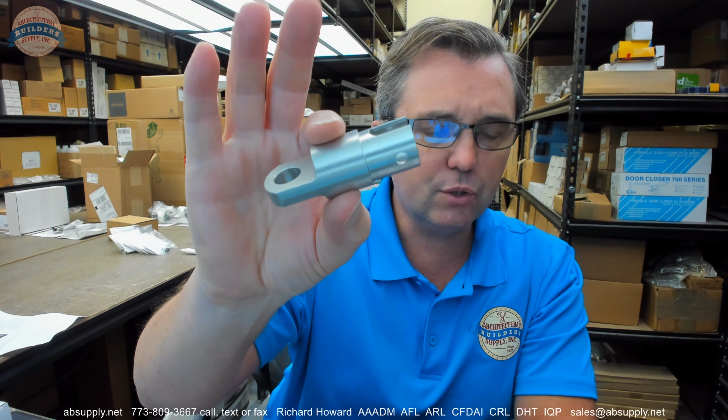But anyway, here is the box - 1500-2 - and here's your extension. The -2 stands for 2-inch, and that's the effective extension that you're going to get on this. You're going to have some bushings, a total of 4 bushings that you're going to get, plus I think it's a 10-32 machine screw and a nut for connecting it.

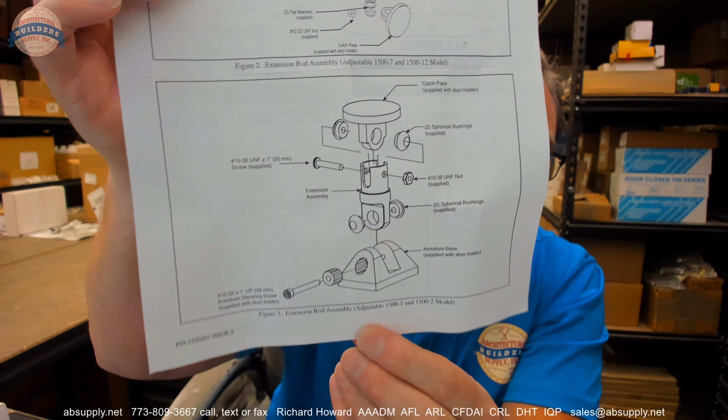You'll get a couple of Allen wrenches, and that is going to be required certainly in the disassembly of the 1500 unit that you are working on. Installation instructions are included; they're very simple and straightforward. The 1500-2 along with the -1, the 1 1/2-inch, is demonstrated down below.

Let's switch to the screen view and take a closer look at the supporting documentation.

There's also a link to the installation instructions. Let's take a look at those now. These are what is included with your hardware.

The 1500 series door holder extension kits are used where it's desired to hold doors open and where a standoff distance between the magnet assembly and the armature base is required. The extension rod kit can be used with these series of holders. Parts from these door holders are used with the extension kits to form a complete unit.

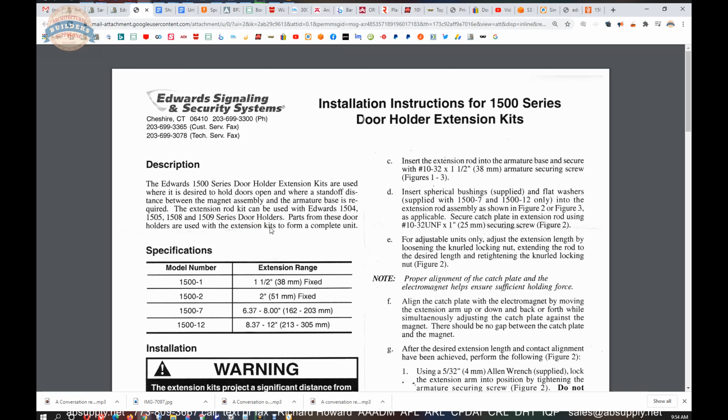What they're saying is you don't get everything you need with this, but you do get what you need to extend it. And we are looking here at our model.

So the bushings, 4 of them, are included here. The 10-32 nut and bolt, the extension assembly is all included.

A couple of Allen wrenches. You're going to need the Allen wrench for here. I'm not sure where the other one is supposed to go because the screw they've included is Phillips, although what you're removing from here is also an Allen drive, which requires an Allen key. That's why they include these 2 different sizes.

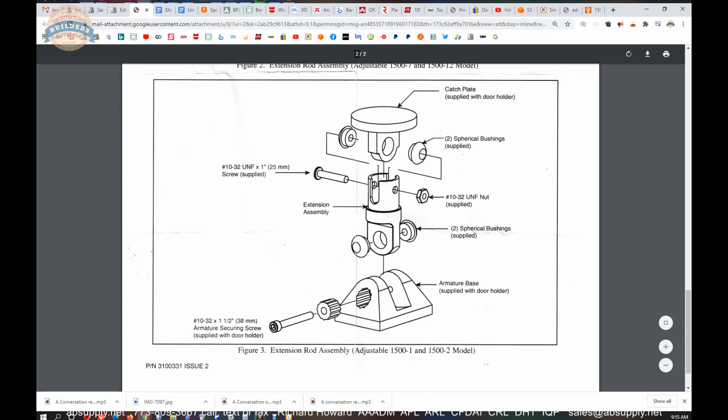I can put a caliper on them, let's just put a caliper on them, tell you what size these are. The larger of the 2 is 0.154, so what is that, 5/32nds? 1 divided by 32 times 5. Yeah, I'd say the larger one's 5/32.

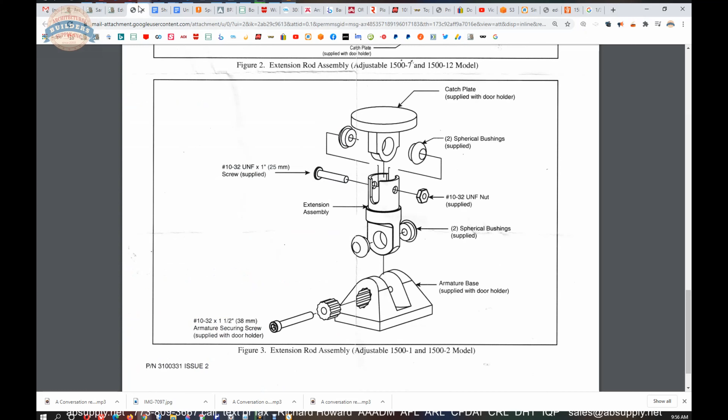The smaller one is 0.063, so that's going to be 1/16 of an inch. That's definitely what that is. Okay, so that talks about that, shows that material, and obviously how it goes together.

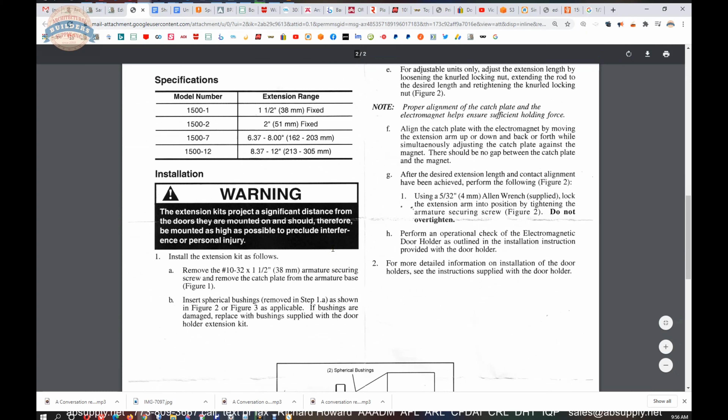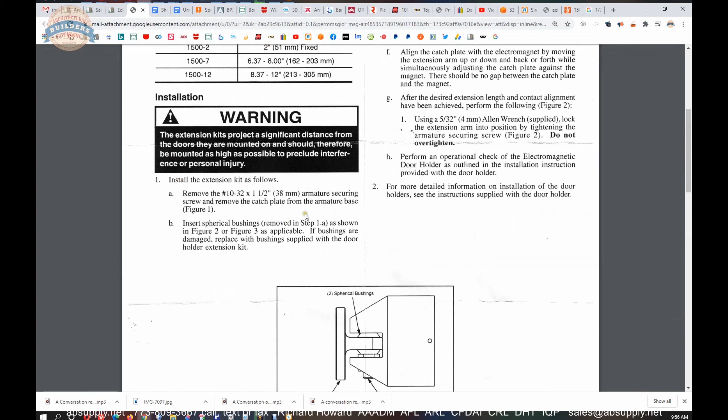Installation instructions are on page 1, down below here. Install the extension kit as follows. Let's just look at the diagram and I'll go over it briefly. Remove the 10-32 armature securing screw, which would be down here.

Remove that first. Insert the spherical bushings as shown in figure 3. You'll install these into the door holder itself, in that yoke style area. Insert the extension rod into the armature base and secure with the 10-32 screw.

That's included, so the catch plate goes down here. You'll thread that together. And then you're going to insert the spherical bushings, if they are supplied, depending on the model.

Align the catch plate with the electromagnet by moving the extension arm up or down, back or forth, etc. You can obviously articulate this. This will go this way. This will go this way.

Proper alignment of the catch plate allows you to arrive at the proper electromagnetic force, sufficient force to keep the door closed, or to keep the door in the held open position. Align the catch plate with the electromagnet by moving the arm.

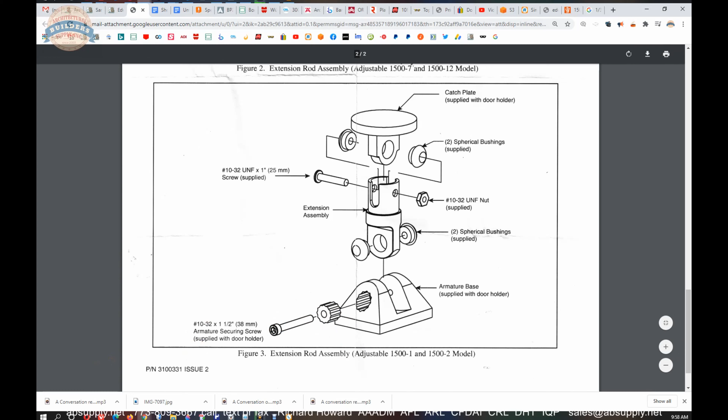After the desired extension length and contact alignment have been achieved, you're in good shape. With the 5/32 Allen wrench, tighten that, but don't over tighten it once you are in position. Then make a final check once you get that all installed. So pretty simple and straightforward.

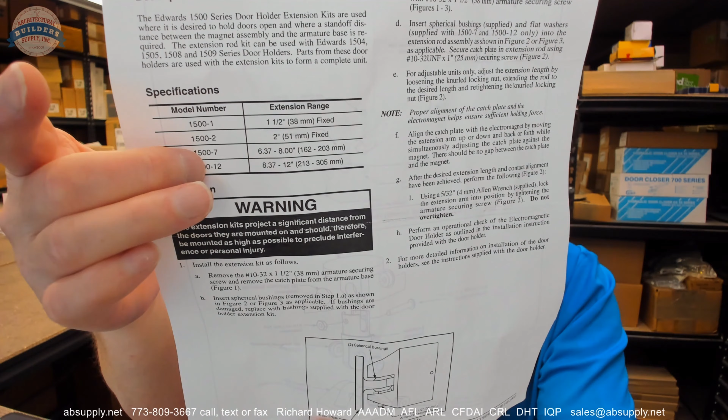There you go. I'd say the first two are called fixed, and the -7 and -12 give you that range that you can hit and be compatible with.